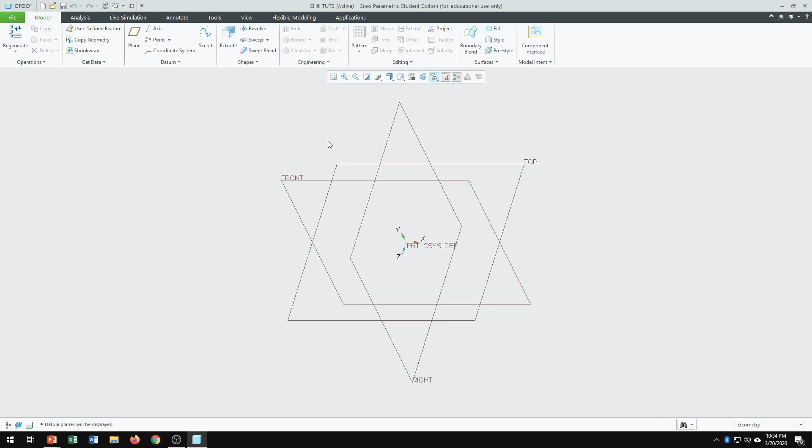Okay, we say extrude, placement define, and we're going to click on the front, and everything else is going to be automatically set. References and orientation. Sketch view, turn off the plane.

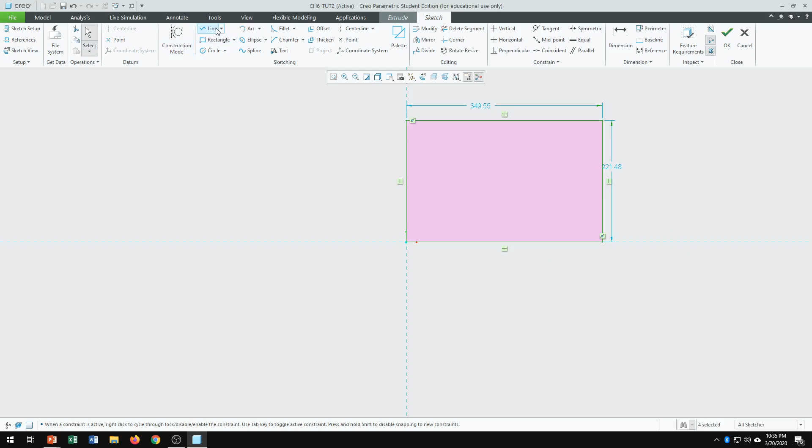No need to put a center line. All we have to do is create a rectangle on this quadrant here. And then I'm going to create a line which will be from here to there, and let me just trim this piece and this piece right there, and we're going to have the height of 8.

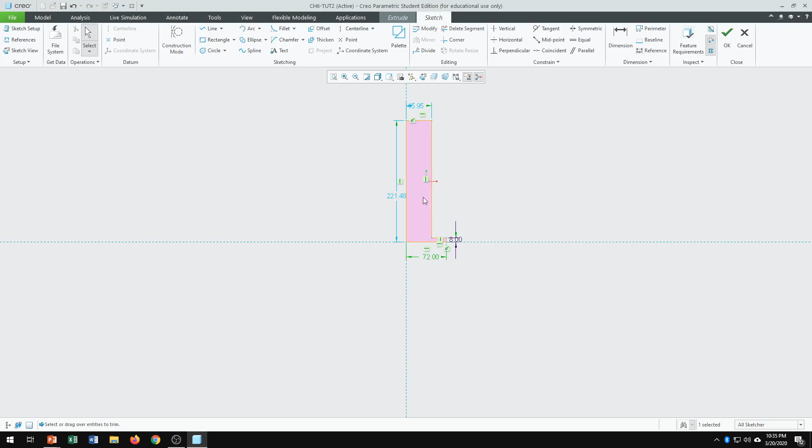Okay, 8, and this measurement here is 72, and this is also 8. Okay great, and this should be, the height should be 68. Let me see if I can double click and go 68.

All right, so this is 8, and everything else is good to go. Okay, very good. So the thickness here is 8, and this thickness is also 8, which is the same.

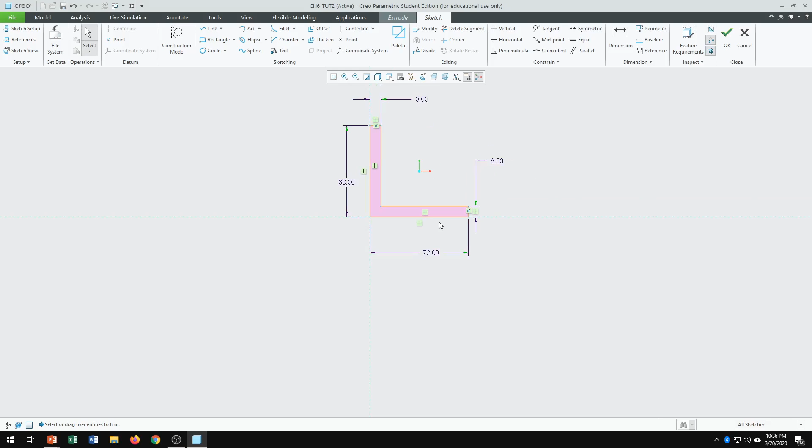And then we have to give another rectangle somewhere here. Okay, and we're going to go down here. This width, we can say this is about...

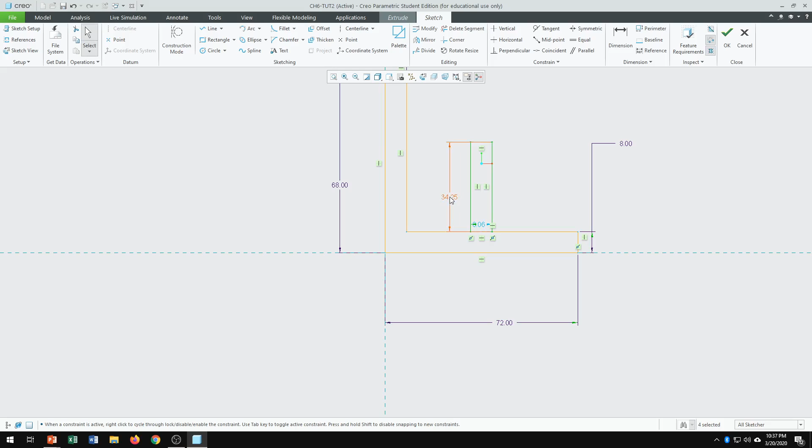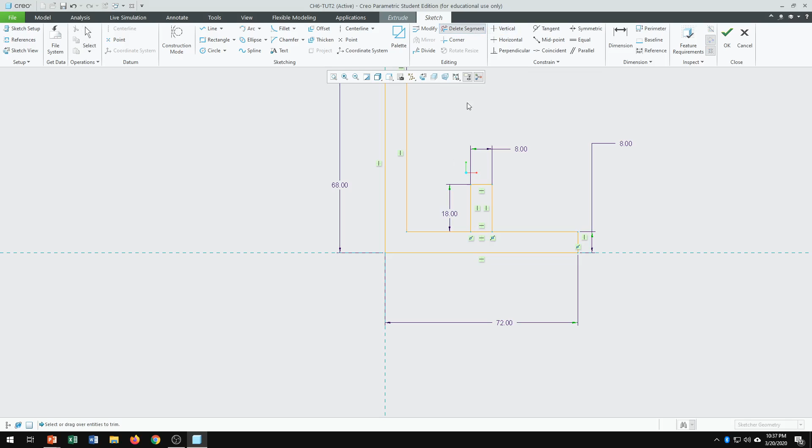Let's see, the height from there to there is 18. Okay, if I see that nicely, we can make this to be 18, and this is also 8. All right, great. Let me have that under control, and this is also, I'm going to trim this piece twice because it's overlapping.

Okay, and then we're going to do this dimension from here to there, which is 20. So from this point to here is going to be 20. And that, if this is 20, that should be 8. All right, let's see what else we need to do in here so the dimensions are correct.

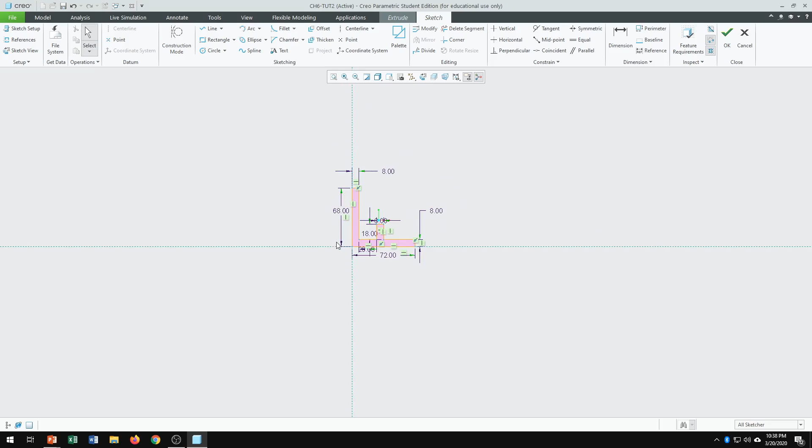So that is 20, 72, 68, 8, and I think that's about it. Okay, that's what we have so far.

We're going to go check, and the depth should be 38. Okay, 38, and that's what we see in here. We go check. All right, great.

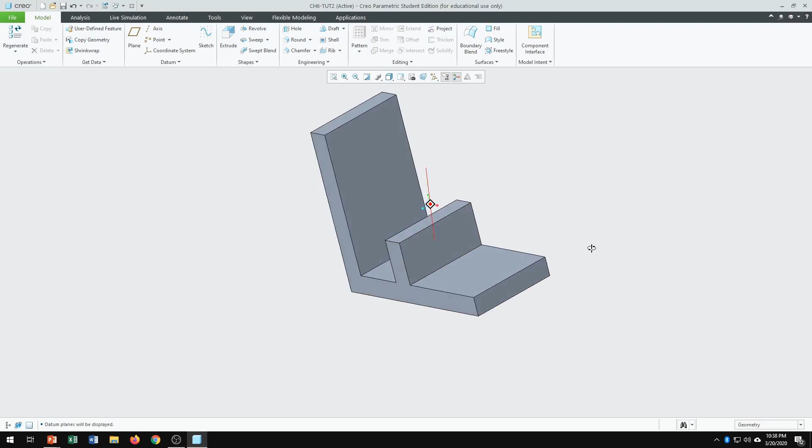Next, let me do something in here. If I wanted to use the front datum plane in the middle, okay, we want it in the middle, it would be good to extrude in both directions.

I'm going to go to extrude and then edit definition. Remember, instead of doing the blind extrude, you can click on the depth and say in both directions. By doing that, you can bring the front datum plane in the middle of this solid model.

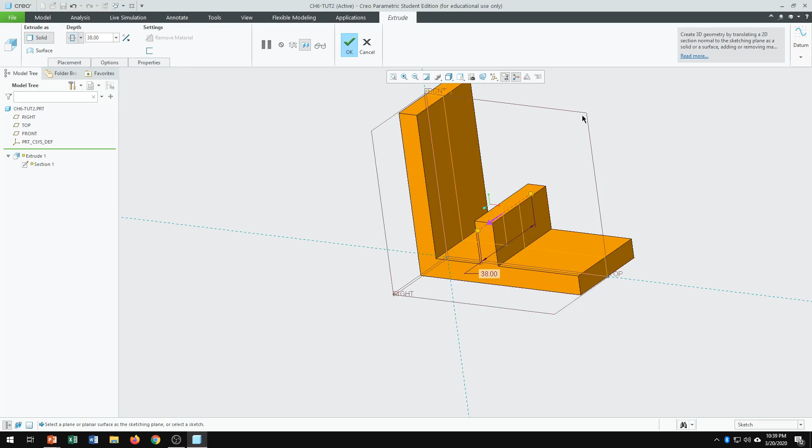See that here? So now we have the datum plane, the front datum plane, it's in the middle. See it here? It's in the middle. So we're going to place the rib on that datum plane.

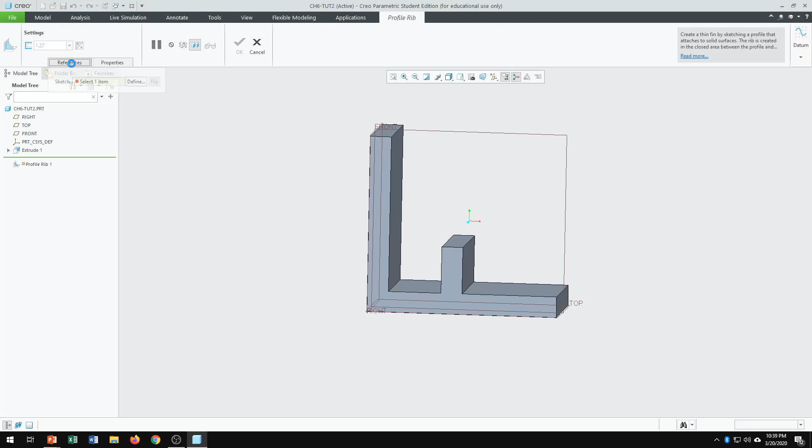Okay, great, so ready to go, and we can go to profile, rib right there, and then we're going to say reference, define. We're going to click on front datum plane. Okay, that's the front datum plane.

The line of sight, you see this arrow is perpendicular to this plane, and the reference and orientation is right, that's good. And then we can go to sketch. Okay, so it comes toward you.

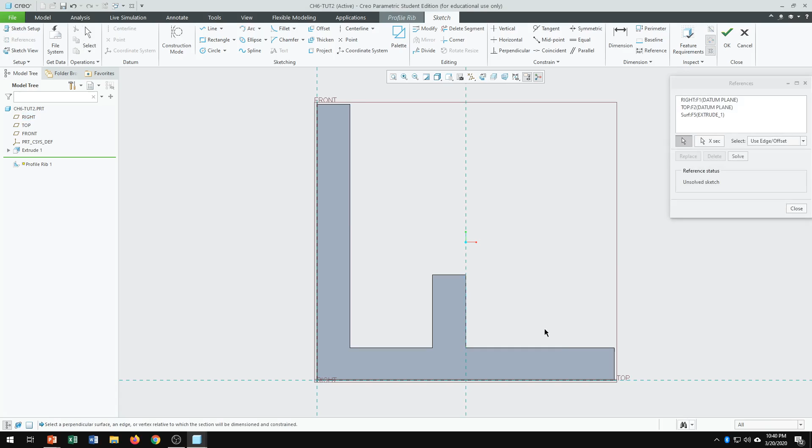All right, so we're going to place references. This is right here, or you can go right click and say references, or just right here, either or. Either you can just click right, and by pressing a right click you see references. So you put references here and you put references there. Solve, close. All right, so we put a line, from this somewhere here to there, and then we're going to give a dimension.

Okay, and this dimension should be 15. The height of the rib should be 15, and the width is going to be from this point to right here, we're going to have, I believe, 32. Okay, I see, let's just go here.

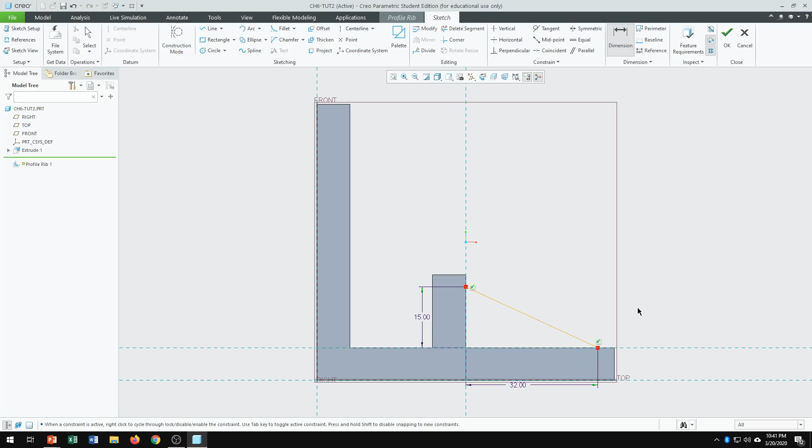It's 32. Okay, great. So now that we have that nicely positioned, we can just rotate them and see where we're at, and then say check, and see this arrow pointed upward. Please reverse that—make sure you click on it and it's going to reverse. Then we're going to give a thickness of the rib, which is 8.

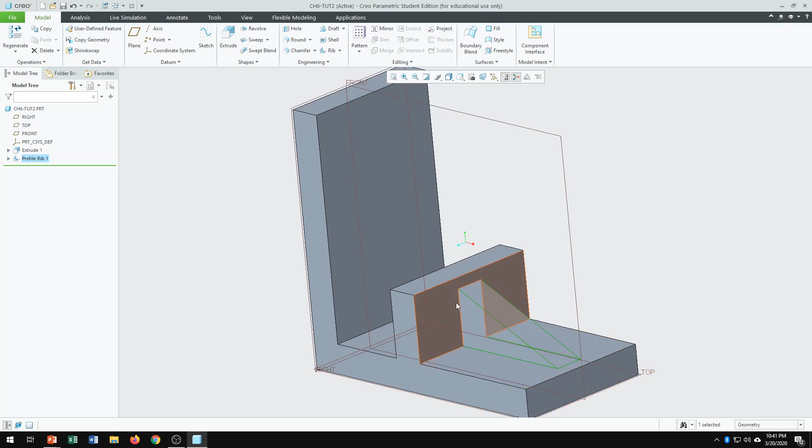Okay, 8. So that's how you create the profile rib. All you have to do is just create the hypotenuse of a right triangle. You don't need to create the entire two legs, like this one and this one—just the hypotenuse, just one line, and there we go. That's what we have.

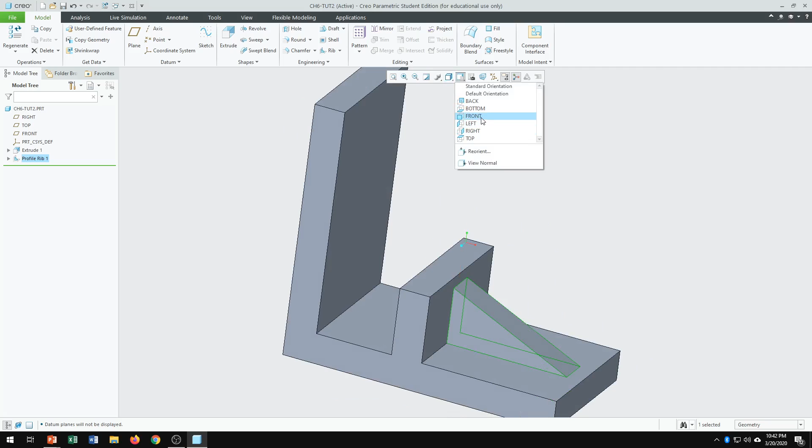Next, we're gonna create this cylinder on this face here. So we don't need the plane or anything. So just look at the orientation, check that always, before you proceed. You say front, that's a front.

If I wanted to color it, I'm gonna say the front is going to be, for example, red. That's a front datum plane, and this is green. Maybe we can say the right—right datum plane—and that's what we have.

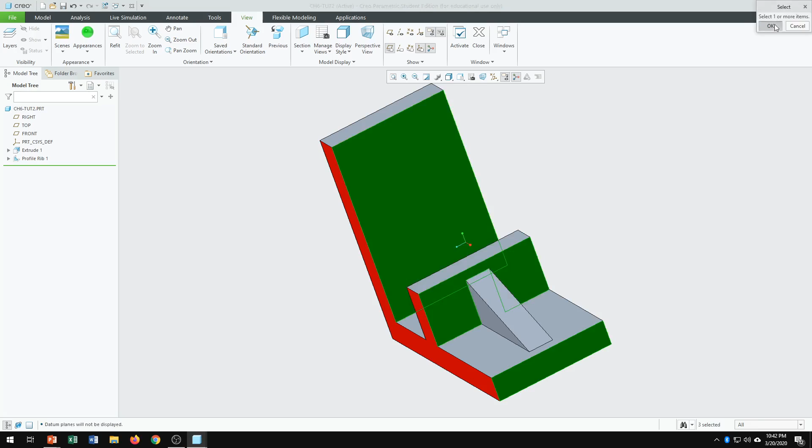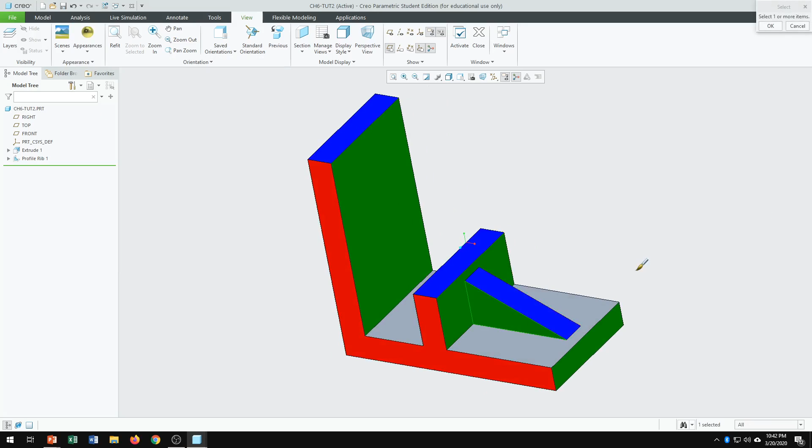And then if you look from the top view, we just make it arbitrary, just a color control, and say this is here. We say okay, and these are the sides of the rib. Maybe we put this color here, and this one, and maybe control that one. That's what will be the rib.

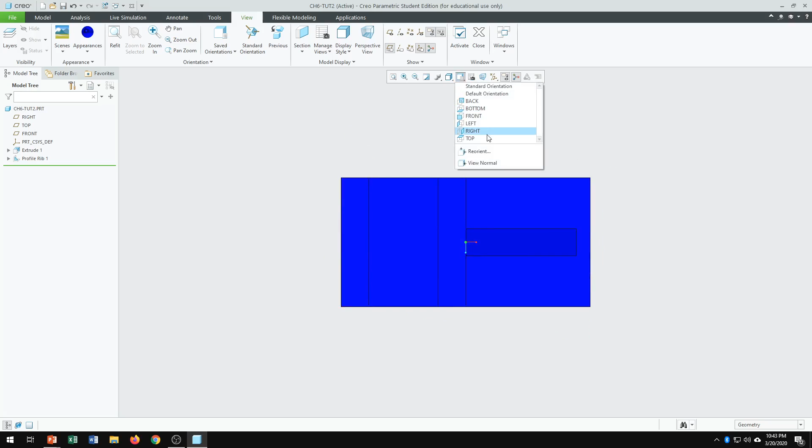And this is also the top, so we should just be consistent—we can say this is the top, also blue. Blue is looking from the top. If you go from the top, everything is blue. If I click on the right, everything is green, except that this is blue because there's a portion of the rib showing from this angle. And the front datum plane, front view, that's red. Top view is blue. Right side view is green.

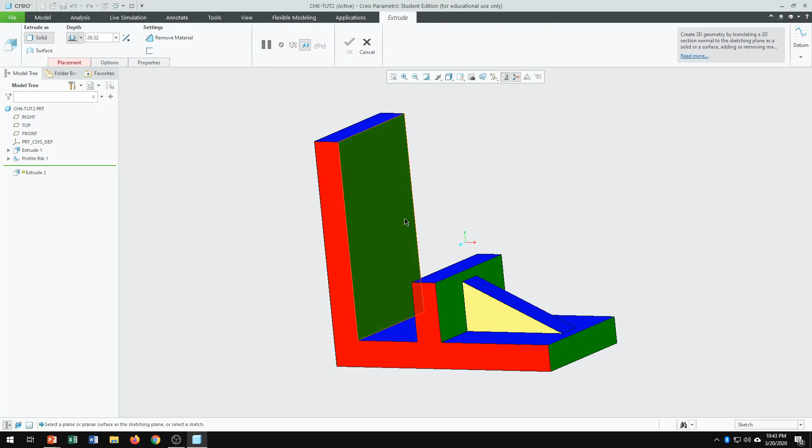So if I go to model and click on this extrude and click on this surface here, we're gonna go to a sketch view. No problem—if for clarity, maybe you can just say no shade.

We're gonna drop a circle somewhere here. So we're gonna click on circle somewhere here. Now we're gonna give dimension. Instead of using the hole tools, I think it's easier on a rectangular surface to use extrude. You can use the hole tools, no problem, but you have a little bit of a difficult time maybe positioning it. So I'll just go with extrude.

So I'm going to dimension—I'm going to have another circle in here. Let's see, no problem, we're gonna do this hole later on.

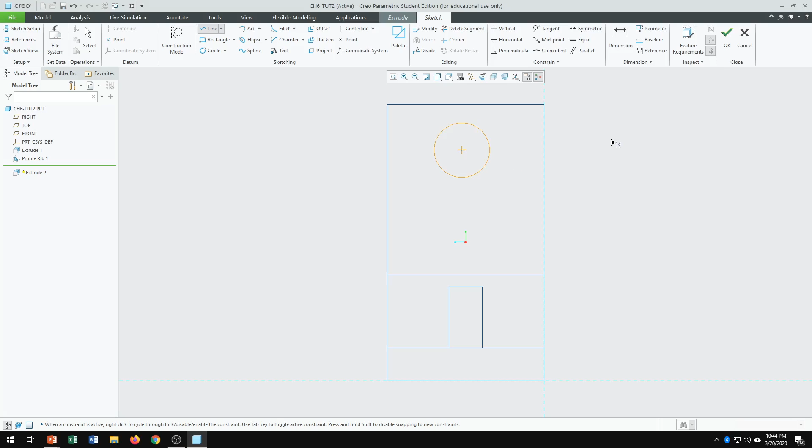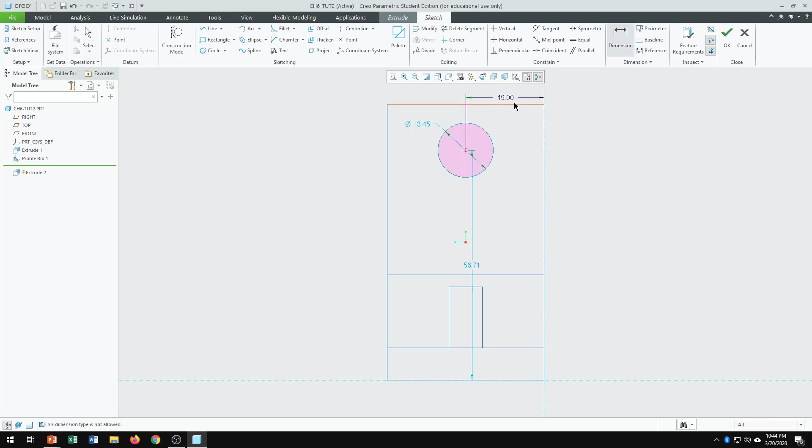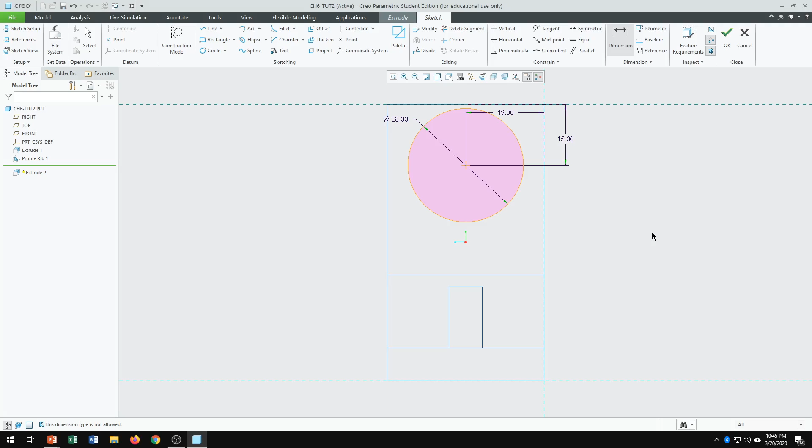So let me dimension this. The dimension from there to there is going to be 19. And the height with respect to the top edge here is going to be 15, and the diameter of the outer circle will be 28. So this diameter is 28, and that is good to go. All right, that's so far so good—28, 15, and that is good.

Now I'm going to show you something here. All right, so we position that and we go, and the amount of extrude is 17. The amount of extrude is 17.

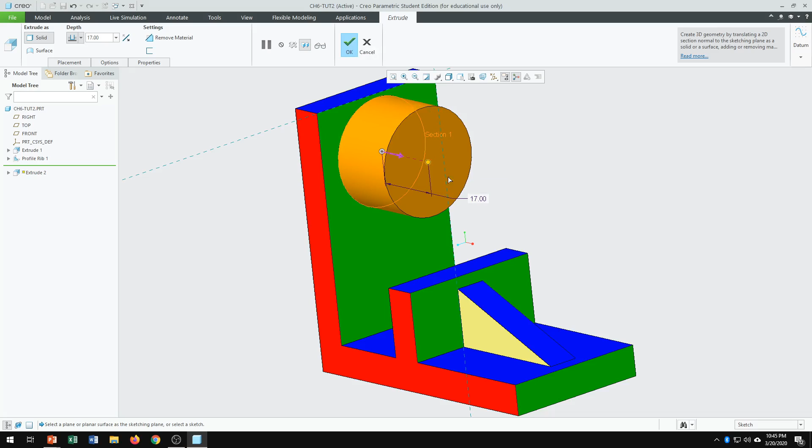All right, beautiful. Now that we have that, remember that I didn't create the second circle, that's a hole. That would have caused a problem because we extruded the cylinder out in this direction, and now we're gonna turn the axis on.

Okay, you can see the axis here. All right, so right there, that's the axis for the cylinder. Now I'm gonna use the hole tools.

This here, I'm gonna drop it on this surface, and you can just drag it to the side for clarity and give the diameter of 20.

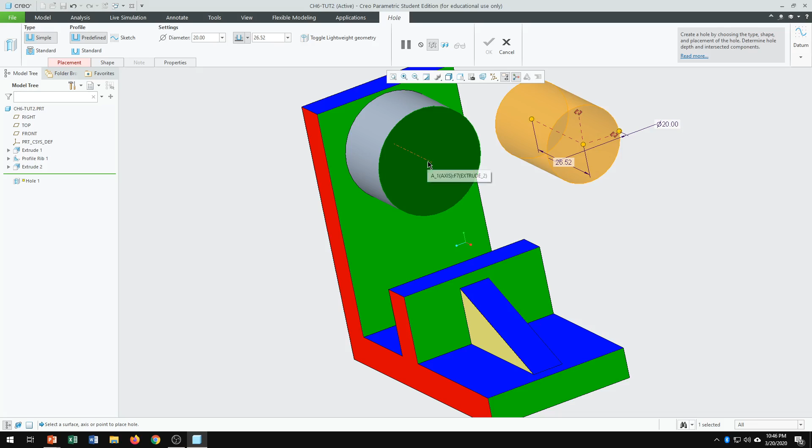Hold the control key down on the keyboard, and then just click on this axis. Automatically this will be a hole that is going to be cut through this cylinder. Just click on it, and you'll see there's a hole cut through it.

So beautiful, see how we did that. Last step was this one here, that hole. Everything is good to go, and then I'll say check.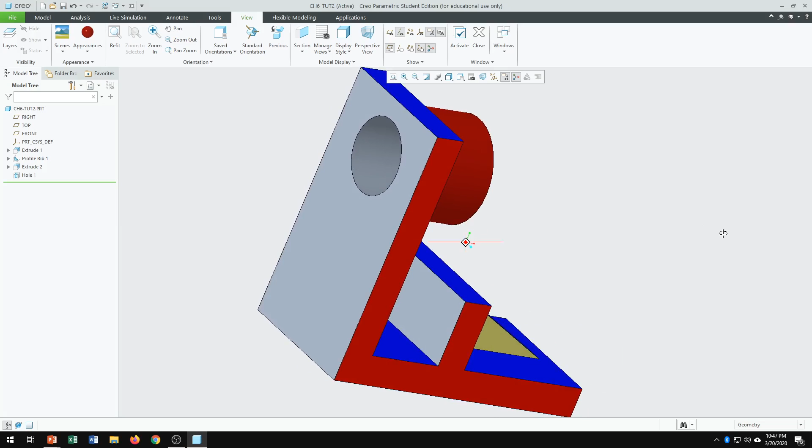All right, so that is the end of this solid model, and I have checked all the dimensions, and it seems like everything is clear. So this is all right, and then you know how to create the mechanical drawing. Maybe in another video I'm gonna show you how to create a mechanical drawing.

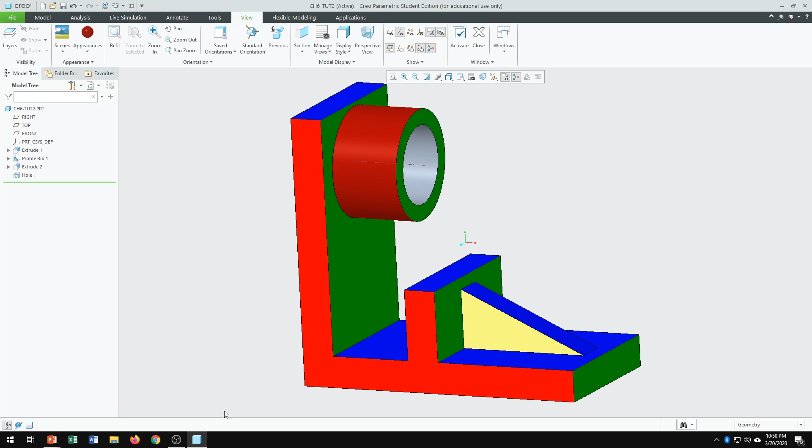Any questions you have, we will meet via Zoom. If you have not used Zoom, there is plenty of instruction or training everywhere. I had to learn—I've never used Zoom in the past, so I had to ask people to show me how to use it, and I went to the training that school provided. So I'm experimenting as well. I don't know everything about it, but I will learn, and I will be able to use it in an effective way.